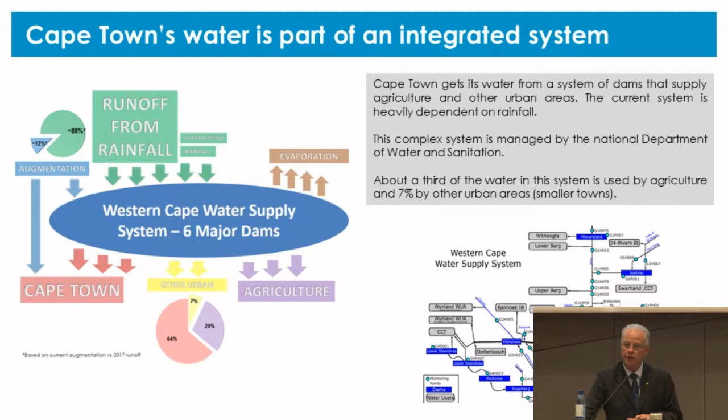Now, I just want to give you context for this drought that we're in. We've had 3 successive years of very poor rainfall, and the slide indicates an average rainfall of around 550, going up to 850 millimeters per annum. We're down to under 200 in this last of the 3 years of drought, which is really extreme. Putting all 3 together, it has a return period estimated at over 1 in 300. So it's an extreme drought that no water supply system can prepare for without going through extreme stress.

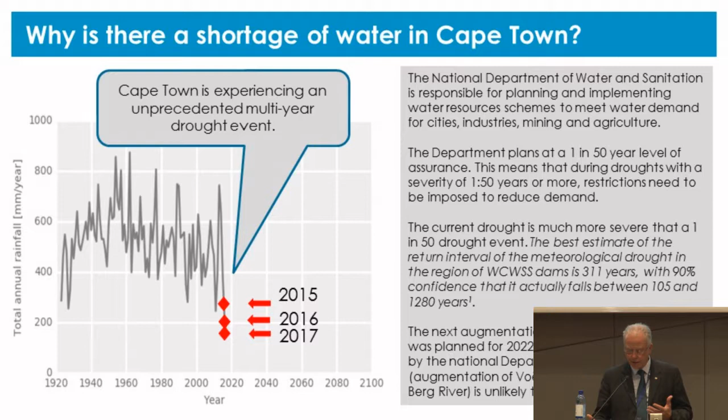Unfortunately, to explain this to politicians and also lay people is very difficult, and that's where the problem lies. Day zero was a term that we didn't necessarily invent. It was picked up through social media from the disaster management sector, I think. But we decided to define it and use it when we needed a quick behavioral change; we'd driven demand down to a point and hit a plateau and couldn't get it lower. So we said, Cape Town, wake up. Day zero can be a reality.

And it was back on the 22nd of January that the projected date for day zero was going to be the 12th of April. So what's happened since then? We got the necessary response. Unfortunately, the media and everybody else decided to take their own interpretation and say, day zero is going to happen, we're going to be without water. So there was mad panic.

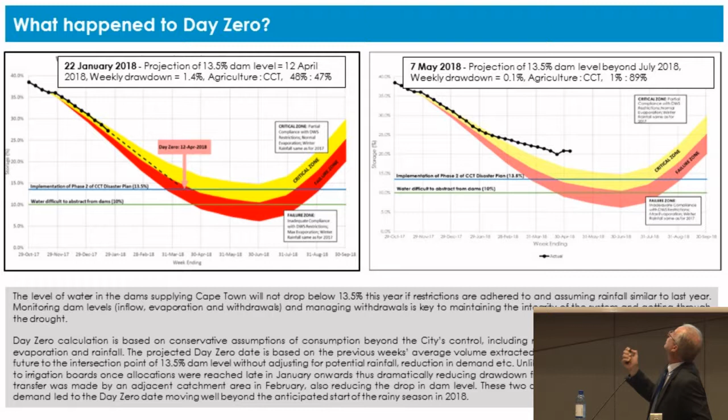It wasn't the intention to panic people. It was to say to them, look, this can happen. So if you do this, it won't happen. But eventually it worked. So now, looking at the graph on the right-hand side, you can see the actual line. In the one on the left-hand side, there's a pointer here. That's the projected line going forward, the actual in the dark. On this side, we show you the actual that has taken place.

Now, you can see the inflection point which kicked that graph out of the yellow zone, which was deemed to be, we could manage it. The red zone would be supercritical, and we'd have to move to special actions that we'd set up. But now we're well above that, and what happened? Well, firstly, we drove the demand down in the urban area, but secondly, agriculture was capped off at their limit of their supply for the year. So that also had a big impact.

So the drawdown on the dams, which typically last year at that time was 1.4% per week, up until a few weeks ago, we were sitting at about 0.1% per week. So hence the flattening of that curve. Right now we had a little bit, you can see the kink there, we had a little bit of rainfall, which obviously helped the situation and actually raised the dams unexpectedly, on my part anyway, by about 0.9%. We're seeing a little bit now, which will also have a small impact. But as long as you have reasonably short periods between these rainfall events, we will start getting some significant runoff taking place.

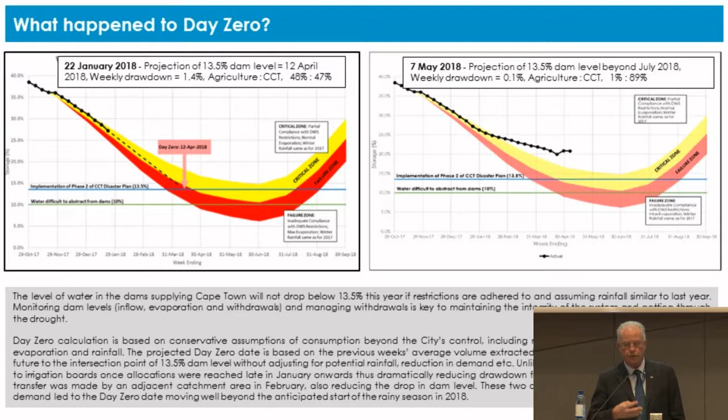Big thing is, of course, communication, having a consistent and sensible communication that the public can understand. Now, that's often compromised by, let's say, the political side of things, and the story gets a little distorted, particularly if you've got some opposing views politically as well. So it becomes very difficult to manage then. System integrity is obviously very important to maintain. And we chose to go for a very aggressive approach to pressure management.

I made a decision early on, and I convinced everybody that going to intermittent supply was the worst thing possible to do for Cape Town. We have a massive 11,000 kilometer network in our mains, and a lot of it is quite old, although we've got quite an advanced program on replacement. The risk, exactly as was shown earlier, was just too high. So we've managed to avoid that.

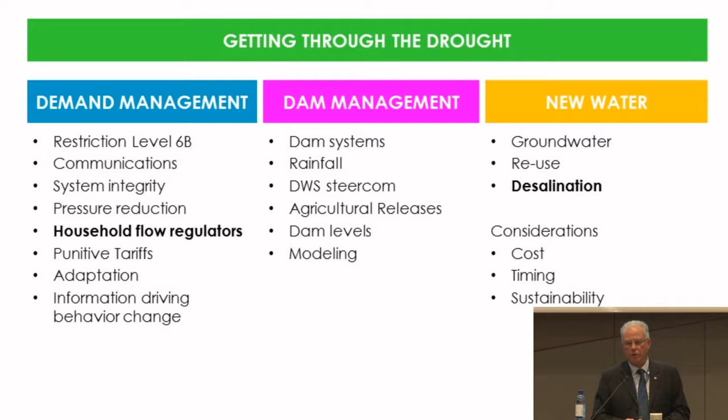Then, of course, the new water, getting the additional supply. Now, we've had a planning scenario together with the National Department over many years, and it was always seen that we would need to respond to this threat of climate change. And our program had been set up to introduce the alternatives of groundwater, reuse, and desalination, in that order, given the reasoning in terms of the unit costs. But we had to accelerate those plans rapidly to meet the crisis that we're in now.

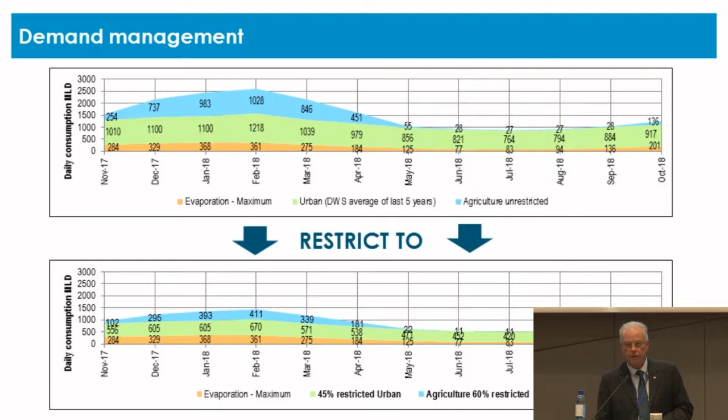And we virtually halved the demand, certainly in the urban, and the agricultural side has been cut. National Department restricted agriculture by 60% and the urban sector by 45%. And they were capped, and no more releases were made once they hit that cap on the agricultural side. And we are very close to meeting the 45% as well. We're currently exceeding it by a small margin, but we believe by the end of the hydrological year, we will have met the restriction level.

And that has been quite remarkable, and I have to say an enormous thank you to my team that have worked so tirelessly to achieve this sort of thing. But it's been a concerted effort for a number of parties.

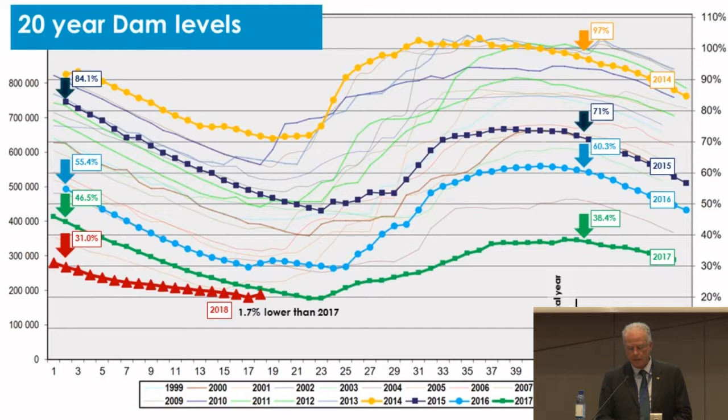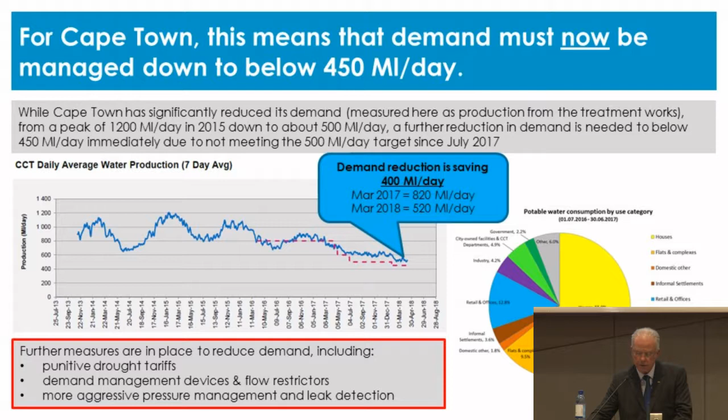And that's essentially through this aggressive pressure management, the punitive tariffs, and all the various other demand management devices that we've got in the system. I won't go into too much detail there because I'm running down, but we've improved the efficiencies in the system, and I'll talk a little bit more about the demand management, the pressure management in a sec.

But just to note that the non-revenue water is at the moment 24%. We were just nudging under 20 before all of the drought effects started to take impact and our demand started dropping down and down. And knowing how you determine non-revenue water, the denominator does have an impact. And right now that we're down at half of the flow that we would normally, unfortunately, the percentage has gone up. But the national average is around 41%.

So we tend to try and compare ourselves with international best practice. And in terms of actual losses, we're around about 16%. We were around about the 14% before these last few years impacted it. We've looked at how we can be more efficient in dealing with bursts. We get an average of about 850 call-outs a day.

And what we did to streamline the reaction time so that we could get out quicker was to start what we call first-line response, or multi-line response. Initially, the call comes in through the call center, it goes to dispatch, they send off just a simple bakkie with two guys in with minimal equipment. They'll go out, identify the problem, leak, burst, isolate it, and if it's a small thing, they'll fix it. If not, they'll call in the appropriate size resource to come. Now that's improved both the cost efficiency and obviously time and response efficiency considerably as well.

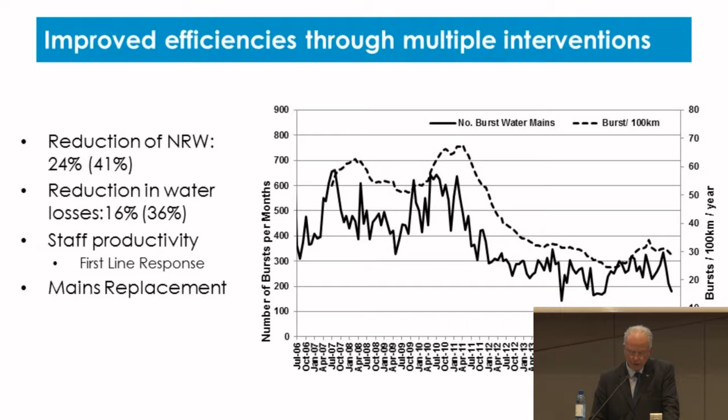So what have we done with demand management? We initiated the implementation and aggressive implementation of a demand management and conservation strategy from the early part of this century, and we've built it up. And I'll show a graph just now to show the trend prior to the turn of the century in demand for Cape Town, and how we've turned that and flattened it essentially over the last 15 years, or longer in fact. And that has cost us, and projected through to 2020, to be about 3.2 billion rand in terms of managing this demand.

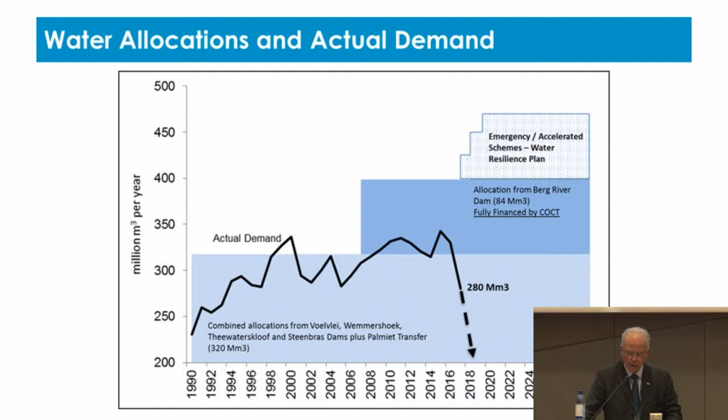I'm almost finished, Ronnie. I'd like to just home in on the pressure management, because at the start of this year, or at the end of last year, we pulled together some of the key operators in the field of pressure management, and we got on board two of the best companies in the country, and we said, look guys, roll up your sleeves, we really need your help here. We've got to take this by the scruff of the neck and drive our demand down further. And we have to squeeze the last drop out of this stone through pressure management, and aggressively.

And that's what they did. So they put a plan together, presented it to us, and we said, go for it. And it was funded, obviously. And Pierre Maritz, one of my managers sitting over there, we tasked him specifically to coordinate and use our demand management teams and use our reticulation guys collectively together with this team of consultants that have come in, and we've squeezed that out.

And the little graph on the left-hand side shows the planned saving in terms of megaliters per day, and what they actually managed to achieve was the red line, and that is from January, the beginning of this year. Currently, we're over 50 megaliters a day that has been accumulated in savings per day as a result of that aggressive action taken from the start of this year. So that has added hugely to us being able to get the demand down. And you can see the main graph there showing the daily demand, and then the red bands are showing the actual savings associated with this exercise.

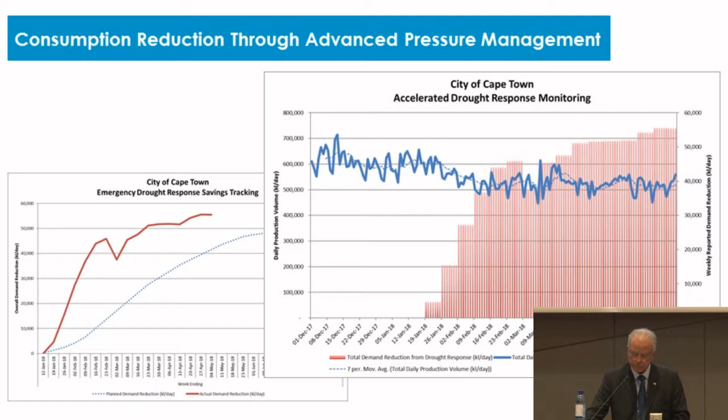That's just a little bit of stats. I won't go into the detail. The other part of the exercise was to look at leakage detection. So through this exercise, since that started, they've done over 4,000 Ks of retic testing and found significant leaks, and we've repaired those as well. The other aspect of it, which was interesting in terms of the analysis of the leakage, was that a lot of the leakage, 90% of it, was seen to be coming not from the mains, but in fact from the connections, or on the inside of the connections.

In other words, in households where people were taking water, but because of the night flows, there were clearly leaks in the house. So now we're about to go into private properties and start fixing leaks in there as well. And it's predominantly in the indigent areas where they are getting free water, so there's not a big incentive there for them to fix leaks. Although we do have the devices on a large proportion. We've been putting these water management devices on. There's about 260,000 of them in our system of 650,000 metered connections that Cape Town has. So we've been accelerating that over the last months as well.

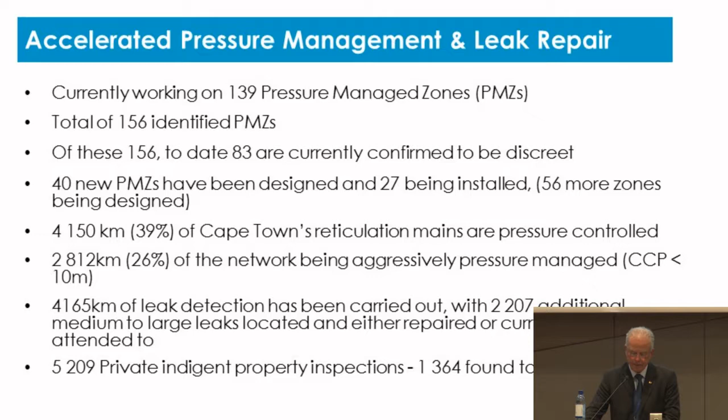So the other part of the equation is adding new water in. And we've started off that program driven predominantly by the politicians reacting and saying, don't worry, Cape Town, we've got this, we're going to build our way out of it, which unfortunately was a bad message to tell the people, because it took the pressure off, well, let's not use the word pressure, took the focus off driving household demand down, because people thought, okay, well, you know, we're going to be building enough.

Unfortunately, the reality struck, and once it was realized that certain volumes couldn't be achieved, and desalination wasn't going to be the solution, because short-term desalination just proved to be way too expensive, and it was also shown, well, we'd researched it as well, but it was certainly shown to us by some experts that we pulled in from overseas to advise us, that you never get what is promised. And it's easy, just switch it off.

You never get what's promised. Maybe with all good intentions, those contractors may believe when they're tendering that they can do it, but it always ends up costing more and always much later than it is intended to be delivered. So learning from that, we've moved away from temporary desal, moved away from temporary reuse schemes, and rather focusing on permanent installations to realize those volumes, obviously at a later stage, but to build our resilience going forward.

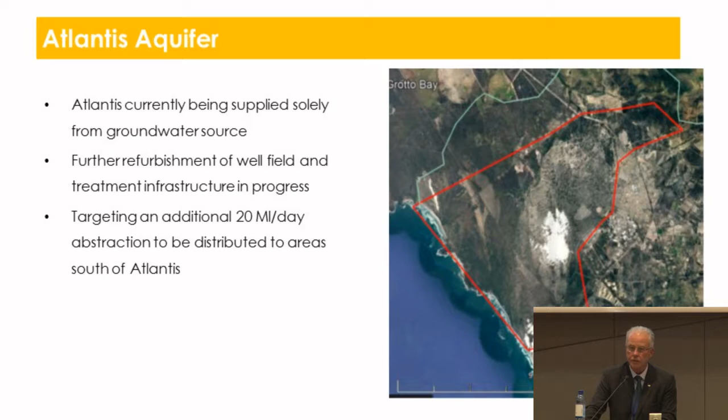But just to talk about groundwater, the focus has been in the Atlantis area, where we currently already have an artificially recharged aquifer system, so we'll be expanding on that. In the Cape Flats aquifer, which is a very large aquifer system, primary aquifer, extensive drilling is being done there, and that will start to produce water into the system within the next month or two as well.

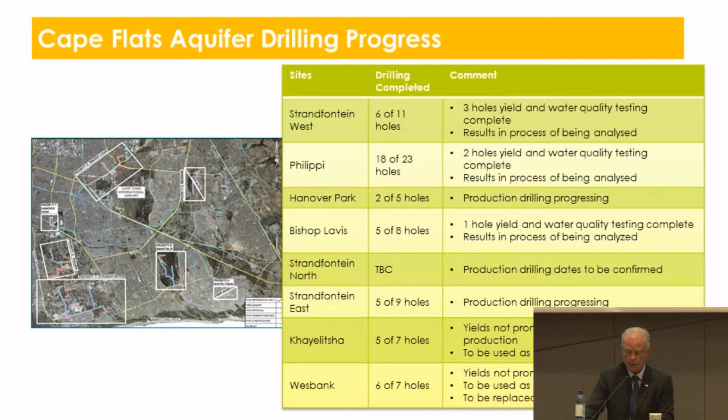Then the very deep fractured rock aquifer, what's termed the Table Mountain Group of aquifers, underlying the Cape Fold Mountain Belt, and this is a massive extended aquifer system running from Van Rhynsdorp, I believe, to Port Elizabeth. And we've been exploring that for many years now and identified good places. So we focused on areas closest to our current infrastructure to drill those. That's very deep drilling, but it will yield very good water and a very reliable source of water as well.

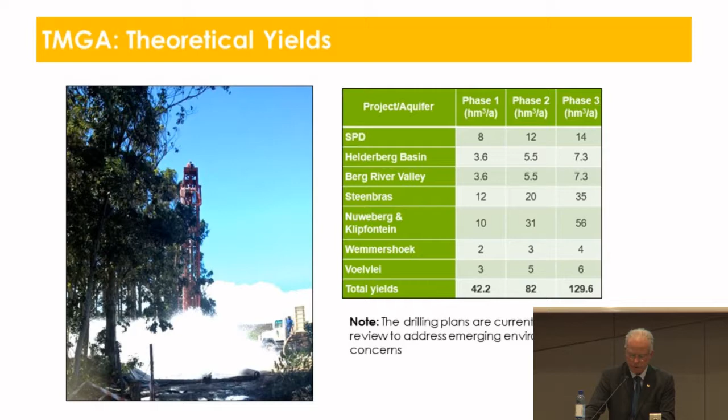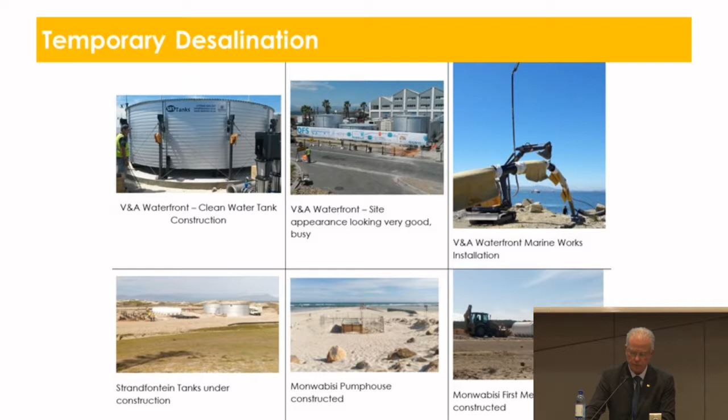And then the temporary desals that we'd already pulled the trigger on before turning it around, they are in fact already producing water, and they're in commissioning stage, just confirming quality sufficient to feed into the system. One at the Waterfront and two along the False Bay coastline at Monwabisi and Strandfontein. So they will be feeding into the system any day now.

Now, I just want to show you what it looked like at the beginning of the year. And as one learns more and starts refining what one can do, you can see the superimposed line that runs through that set of bars is in fact where we are now. So it always looks a lot more rosy until you really get to grips with it. So augmentation is never going to be the savior, but it has to be there, and we realize that we need to build it in for resilience going forward.

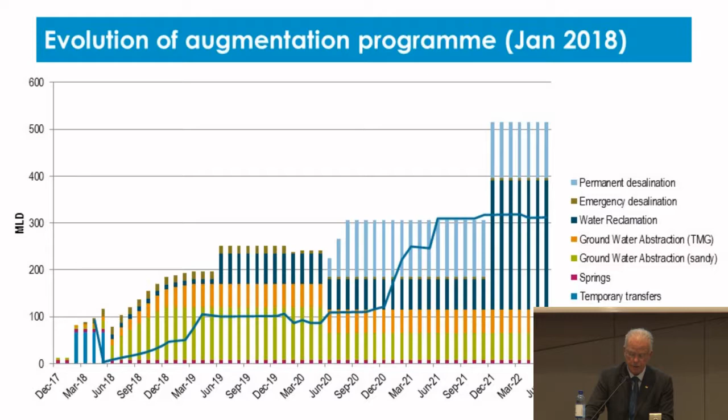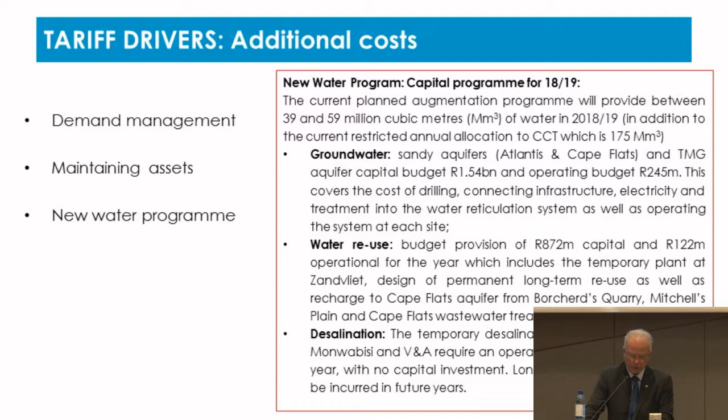If you're between the 6 and the 10.5, you're 46. But as soon as you start migrating up into the higher bands, where we don't want you to be, you pay up to 800 Rand a kiloliter. Now, that's quite a significant punitive tariff. But if we're now selling effectively half of what we used to sell, it means we're going to have to put the tariff up to double in order to maintain the revenue stream. So that's effectively what we've had to do.

Then your tariff, obviously slightly reduced per kiloliter used within the bottom band, up to about 10.5, is essentially driven by the average cost. Once we go up to the higher level, it's the marginal rate of additional demand-driven augmentation costs that then drive those bands of the tariff.

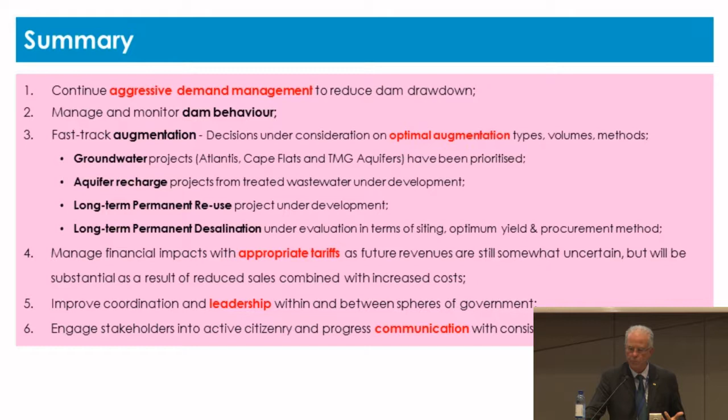So Pierre actually took this picture of Tim yesterday. It was interesting just to compare how we've done against what he believes are the 10 points. And I think largely we've covered most of them, perhaps through good luck, because I hadn't seen your presentation before.

But I have to thank Cape Town, the people, and certainly my team for where we've managed to get to now. We're not out of the woods, but although our dams are 1.5% lower than we were at this time last year, I feel more confident that we have a better chance of getting through another bad year if we have another bad winter, because we know what we can achieve now. And there are systems in place to manage it far better than there were last year at this time. So thank you very much.

Okay, thanks, Peter. I think everyone that is interested in Cape Town and what's happening with the water will be having a sigh of relief just for a little while. So I think at least we can shower, etc. Well, not bath, but certainly use some water. Thanks very much for that. We do have one other